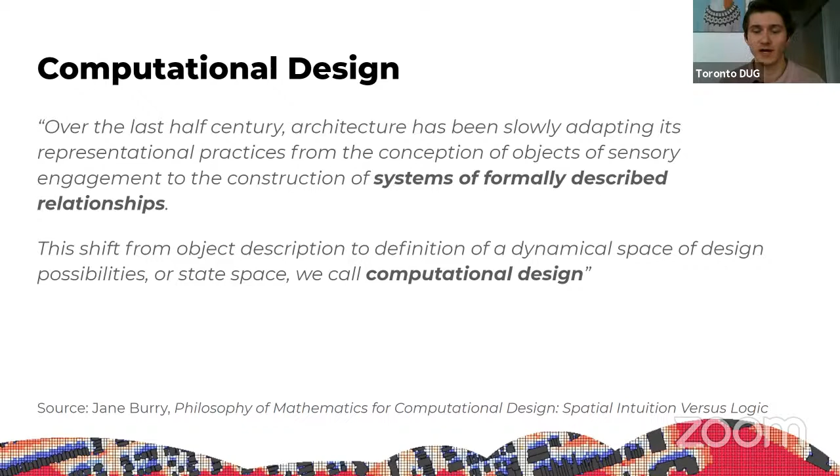Computational design begins when we construct systems of formally described relationships. One of the famous examples of such systems is Gaudi's analog parametric design computer. He explored some of his designs using scale models made of chains or weighted strings. They took him years to build, but gave him more flexibility to explore organic designs, since every adjustment would immediately trigger the physical recomputation of optimal arches.

To summarize, computational design thinking helps designers make sense of loopy, complex systems, chunk big problems into smaller, more solvable parts, devise design systems that integrate environmental performance, manufacturing constraints, assembly logics, and material characteristics, and deduce form from those relationships.

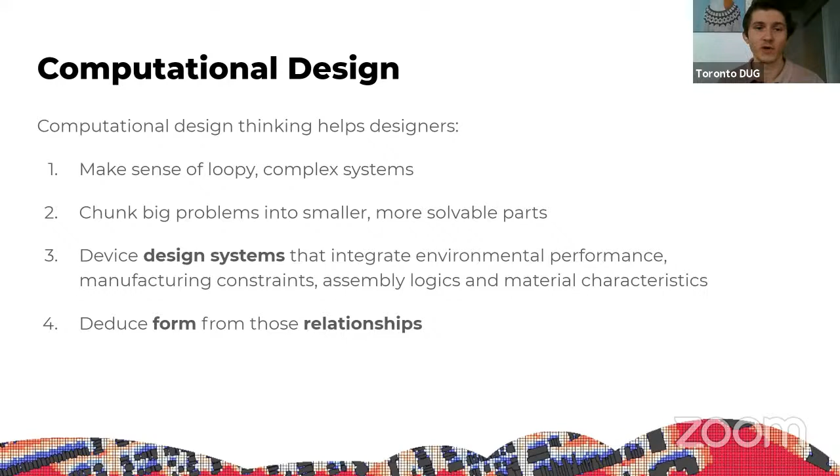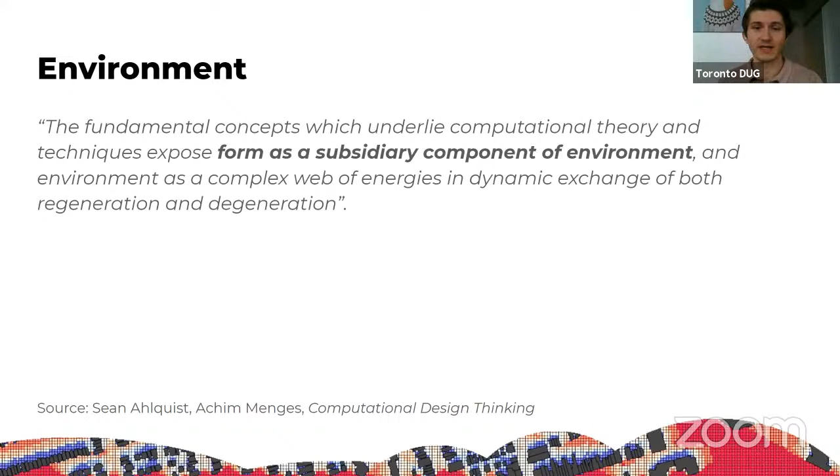Manufacturing, assembly, and disassembly can be engaged with the environment, materials, structural, and architectural systems by means of computational design. Fundamental concepts which underlie computational theory and techniques expose form as a subsidiary component of environment. The upcoming presentations and following discussion will help us understand how to harness information from environment, materials, and construction systems in order to construct design systems that have the capability to deduce shape, behavior, and the environmental impact of the artifact we design.

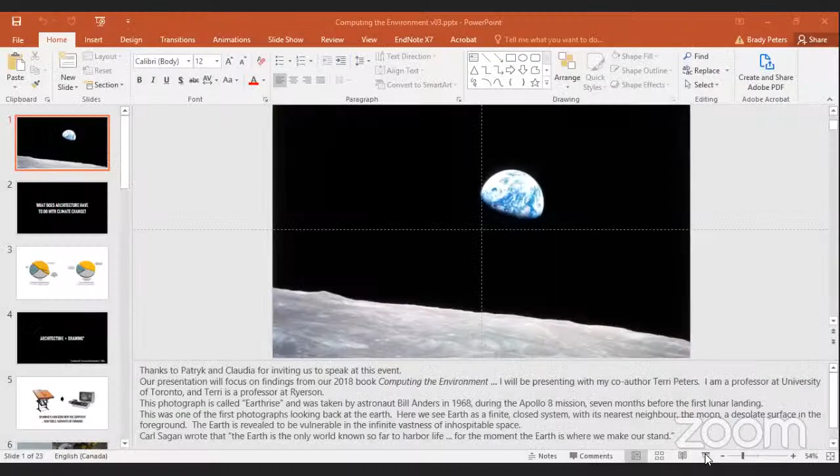This photograph is called Earthrise and was taken by astronaut Bill Anders in 1968 during the Apollo 8 mission, 7 months before the first lunar landing. This was one of the first photographs looking back at the Earth. Here we see the Earth as a finite closed system, with its nearest neighbor, the Moon, a desolate surface in the foreground. The Earth is revealed to be vulnerable in the infinite vastness of inhospitable space. As Carl Sagan wrote, the Earth is the only world known so far to harbor life. For the moment, the Earth is where we make our stand.

So we only have one Earth, so let's protect the environment. But this meeting today is about buildings. So what does architecture have to do with the environment and with climate change? Well, all buildings, even the most sustainable, use energy resources and produce emissions. So this is clearly one way that architecture impacts the environment.

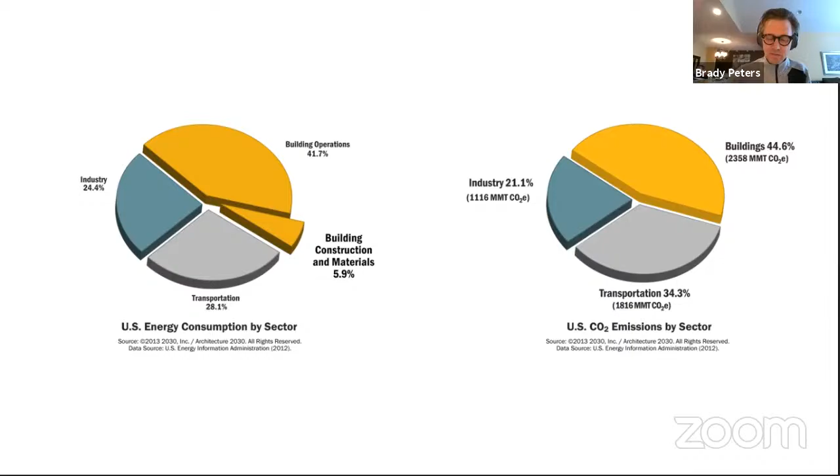I would like to take this discussion in a slightly different direction. The definition of what it means to be an architect is linked to design tools. As Jonathan Hill has pointed out, it was the invention of drawing that enabled the creation of the architect. Being an architect is defined by our ability to conceive of, draw, and communicate the plans for a building at a remove from construction.

However, architects no longer draw on the drafting board, but now with the computer. But the computer is not the same as the drafting board, as Patryk pointed out earlier today. And so with changes to our drawing technology come changes to our profession. New tools mean new ways of thinking. As computer scientist Alan Kay states, computational tools are no longer only rhetorical, but they are processes. They simulate and decide.

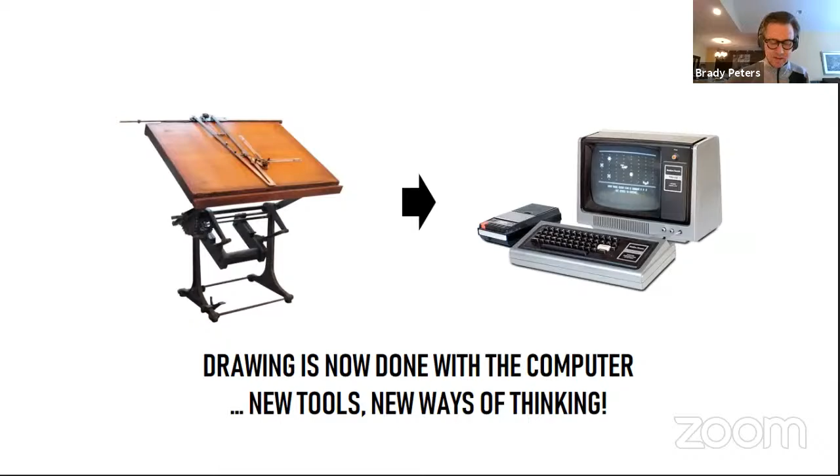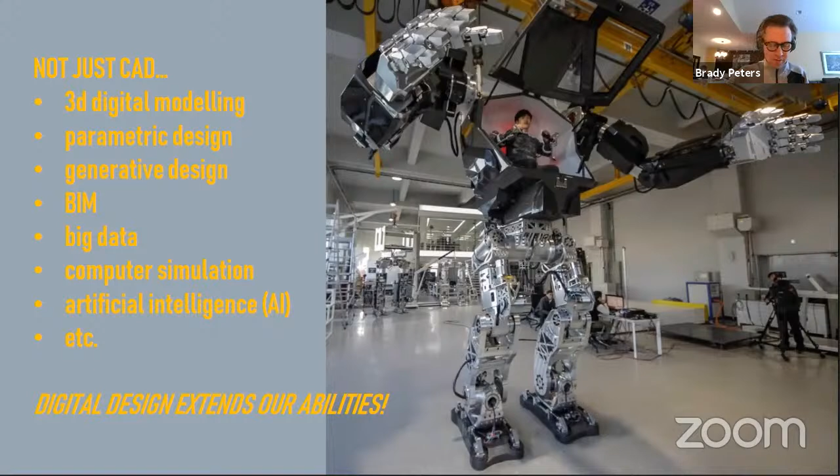And it is not just CAD anymore. 3D digital modeling, parametric design, generative design, BIM, big data, computer performance simulation, AI, etc. These are all now part of the architect's new drafting board. Through computation, architects are now able to realize the potential that Ivan Sutherland hinted at when he invented the first CAD system, Sketchpad, in 1963. Like the mech suit pictured here, digital design extends our abilities.

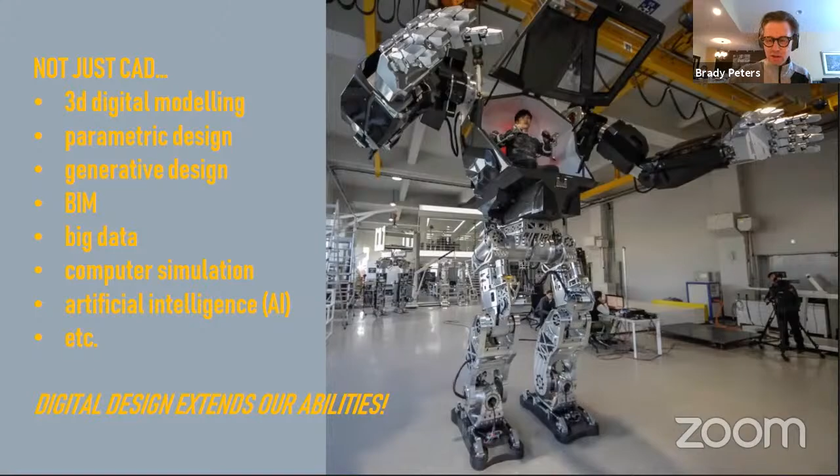So, architecture is related to drawing and also very much related to design. Architects design for the future. Necessary optimists, and to borrow from Herbert Simon, architects design to make existing situations into preferred ones. Architects, professionally and ethically, are driven to make a better world, not just for their clients, but for the population at large and for the environment as well.

So, given that there is a climate crisis and buildings are part of this problem, they're impacting this crisis, and that design is now done using computation, how can our design technology help us? How can computation impact design to improve environmental performance? This was one of the driving questions for our book, Computing the Environment.

The research done for this book comes from both Terri and my firsthand knowledge of architectural design and environmental simulation practices, but also for this book we carried out interviews with architects and engineers from leading practices worldwide. One of the things we found was that in every practice we interviewed, architects and engineers were using a whole constellation of different design technologies.

Today, building designers must be able to navigate a constantly changing landscape of digital tools. For example, the Building Energy Software Tools Index lists 147 software packages just for environmental design. And it's not just using tools, but developing their own tools. The designer has become the tool maker.

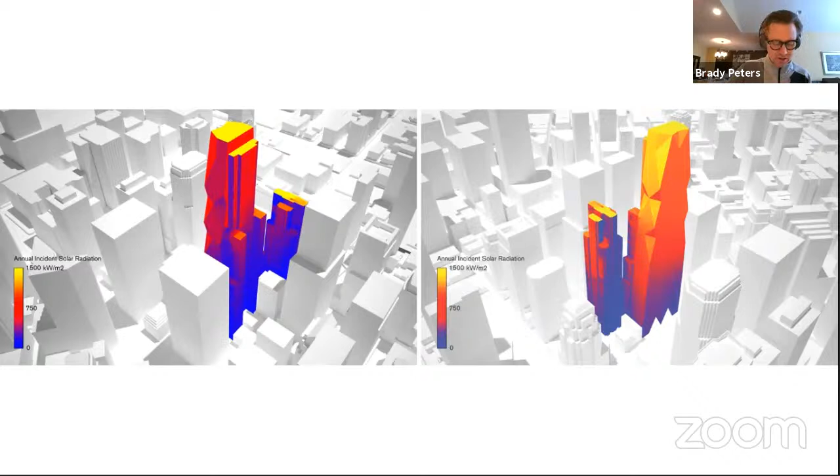Author Kjell Anderson writes that while design simulation is often seen as a specialist tool for predicting energy performance, the greatest value for architects is the freedom to play with design ideas and receive timely feedback. The SMG has written a custom tool for MicroStation that implements radiance and have created their own wrapper for widely available environmental tools, Ladybug and Honeybee, which they call LadyBee.

A key part of the design for this project is at the ground floor, where the building has been 'lifted up' to create a new urban room that is open, accessible, and transparent. The project promotes a sustainable model of high-density mixed-use development.

The team used performance simulation to understand the user experience in various ways: light levels, both artificial and natural, glare, the thermal environment, and acoustics.

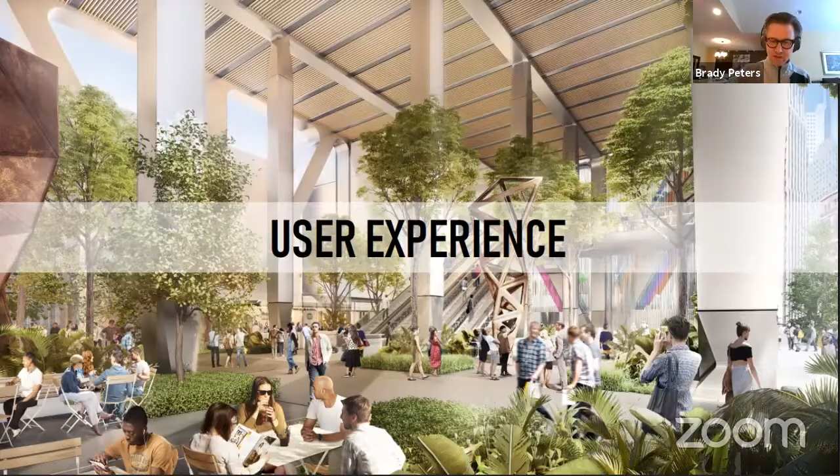Over the last 10 years, the SMG has developed expertise in computational fluid dynamics, CFD, which is used to predict wind and airflow. A series of CFD simulations were carried out at various places around the tower, studying the influence of various building shapes on wind distribution.

Both CFD and wind tunnel testing were done, but CFD offers considerable advantages as it can be completed much faster and in-house. The SMG ran simulations for 16 wind directions, and this data was combined with weather data.

They found that the tower was intercepting wind at high level and pushing these winds down to lower levels. In response, the SMG designed a wind canopy so the wind doesn't reach the inhabited level.

The SMG also found that the software architects use to compute the radiant environment is generally fairly inaccurate, so they aim to develop new tools that predict performance with a reasonable level of confidence yet still run fairly fast. For the urban room, the design aspiration was to make sure the space was comfortable.

Using the Universal Thermal Climate Index metric, the team simulated the public space along with similar spaces in the surrounding area for percentages of the year that are comfortable.

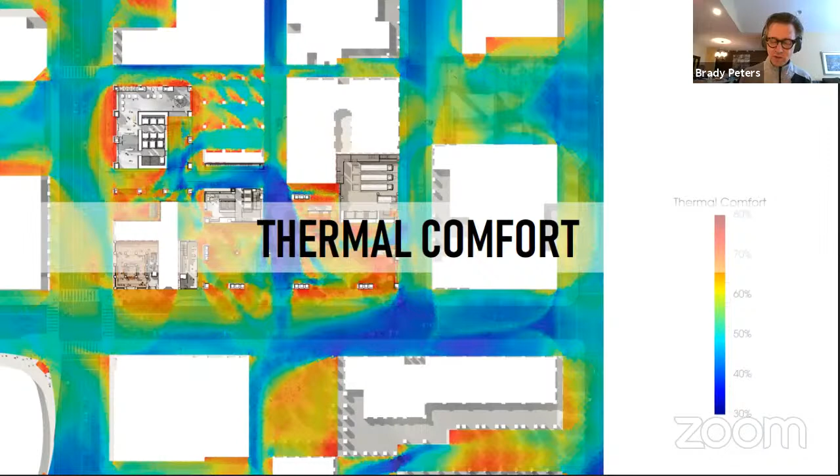Xavier De Kestelier explains that we find ourselves in a middle ground, creating tools related to design, but that are still really accurate.

Acoustic analysis was largely done with a plugin to Rhino called Pachyderm, an open source software that computes performance using ray tracing algorithms. Philip Robinson, the team's former acoustic expert, has found that importing geometry from CAD to commercially available simulation software is an onerous process.

But by using Pachyderm and Rhino, he is able to both design and simulate using the same software, and therefore does not have to bother with translation.

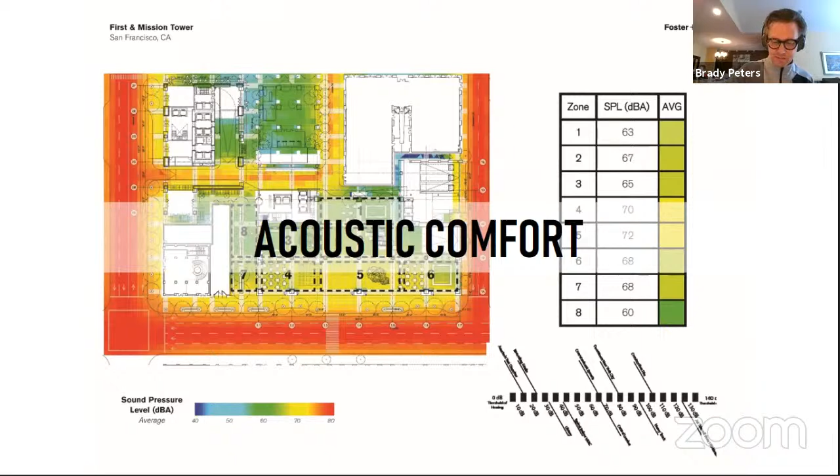As computational tools for environmental design mature, the potential of what teams like the SMG can do with them becomes much greater. SMG partner Irene Gallou speculates that simulation will give young architects a tool to understand the environment and to develop intuitions about the impact of architectural design on environmental performance.

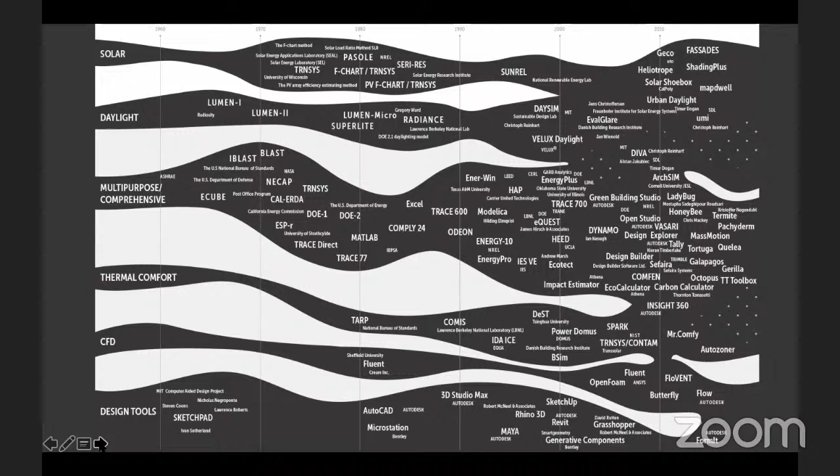Over the last 10 years, there has been an explosion in digital tools that designers can use. In the book, we examined a history of building performance tools from 1960 to present and created this diagram, clearly inspired by Charles Jencks's 1973 graphic of architects and movements. We looked at the recent history of building performance and simulation tools, when they were introduced, and really saw this huge explosion in the last 10 years and even increasingly in the last 5 years.

One of the main points I'm going to draw out of the Computing the Environment book is this idea of visualizing, and visualization leading to understanding. Visualizing data allows us to understand it, to share it. That's how we can communicate and create trust between disciplines.

To illustrate that, in the book we interviewed GXN, which is the innovation group within Danish office 3XN, and talked to them about how they use digital tools and how they use simulation.

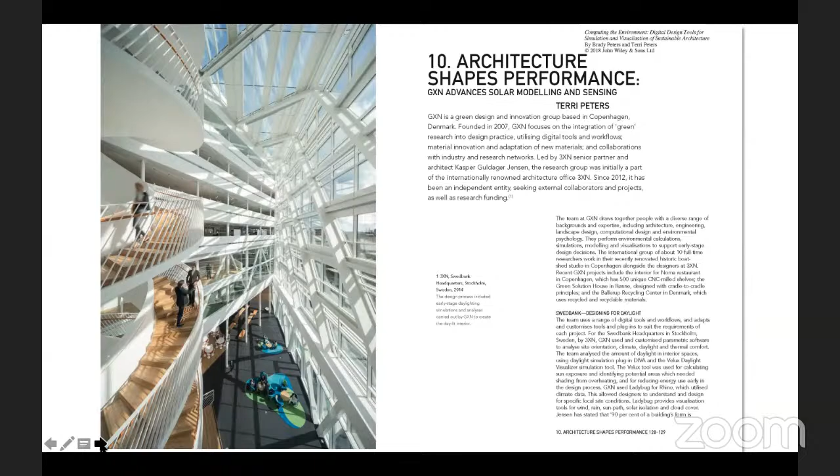This example illustrates that they regularly use environmental simulation on all of their design projects at an early stage. For this example of a new bank headquarters, they worked to take quite an abstract design idea—openness, connecting to the street, connecting to the public. The client's wishes were to translate this into creating a collaborative, comfortable environment for people working in this building. So how to translate these big ideas into architecture?

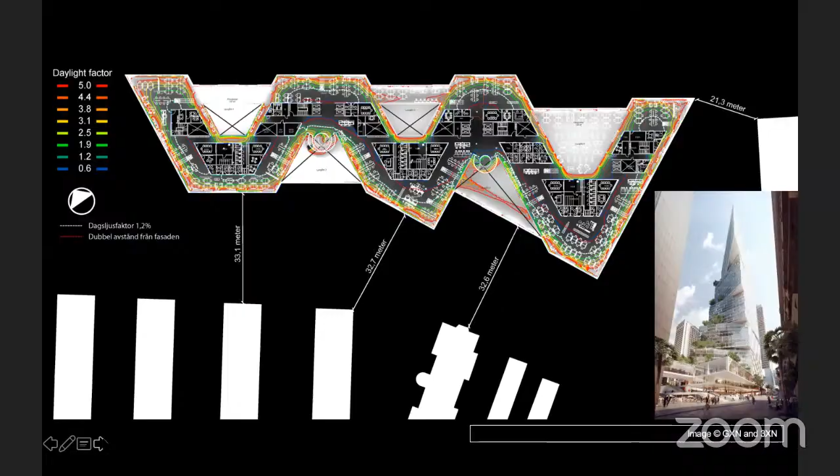A key was to use daylight to drive the building's form. In this image, they used the Velux daylight visualizer tool to calculate the daylight factor for interior spaces, while considering the relationships between building geometry, orientation, and views. You can see in the small photo there, the floor plate shifts in orientation as it moves up. So they used environmental simulation to get actual visual feedback about design decisions.

Rather than spreadsheets of data, they had visual graphics that allowed them to better make design decisions and bring them closer to design intent. So in this case, the goal wasn't about minimizing energy use and energy consumption, but actually their goal was for people to use the space, to enjoy the space, to be comfortable.

The client for Swedbank said some people had been at the company for 25 years and only met each other for the first time the week they moved into the new headquarters. They had never crossed paths before, even though they worked in the same office. So it's this idea that they can use the feedback from their simulations to make design decisions to get closer to their design intent—in this case, for collaboration, for openness, for people enjoying the building.

The second point I wanted to draw out of the Computing the Environment book is that data can also change behavior. So we can use data to change and understand people's behavior in buildings using real-time feedback.

Another project from 3XN is their Green Solution House, a hotel and conference center in Denmark. I'm using it to illustrate the idea that some of the new metrics for sustainable buildings and energy consumption are not easy to visualize. With this kind of data, if you can't communicate the findings, it's of limited use.

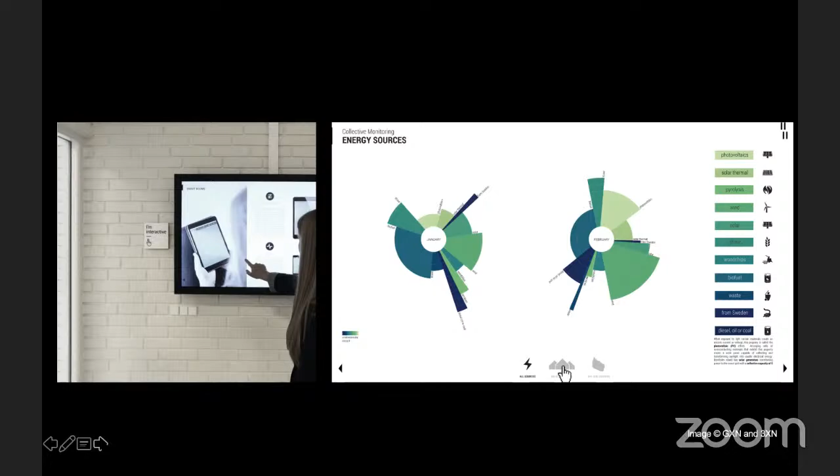This is called the Smart Room Collective Monitoring Project, and it was a collaboration with GXN and Autodesk Research. It really addressed the idea that visualizing data is an important part of collecting the data and putting action to it—so it looks at communication of data. And these are the nice rooms at the hotel here.

So the third point I'm going to talk about is designing for microclimate—collecting and using on-site microclimate data to inform simulations.

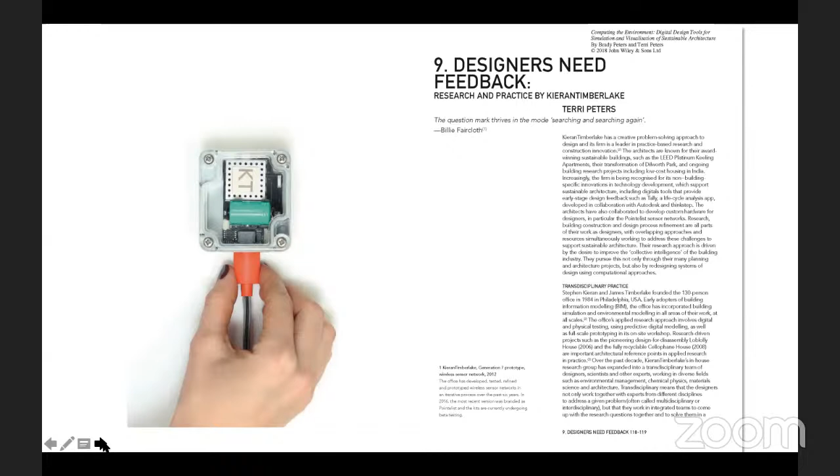Another office we interviewed is KieranTimberlake, an American office, and they use real-time environmental feedback as a design tool in their projects. We interviewed them about how they use digital design tools—which tools they use, how they use them in projects—and we were surprised to find that in recent projects they are really interested in collecting microclimate data on their sites.

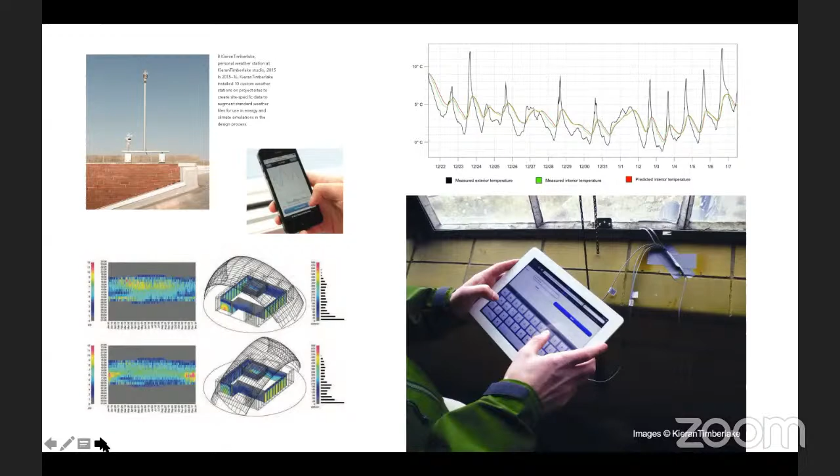They're actually installing weather stations on site on different projects, and recently installed 10 custom weather stations on project sites. So rather than relying on more general climate data, like TMY files for a specific location, they're collecting their own data to input into their simulations. They also do renovations, and they're looking at collecting really accurate, site-specific data about the renovations they're starting with, in order to develop responses that really connect to the existing conditions.

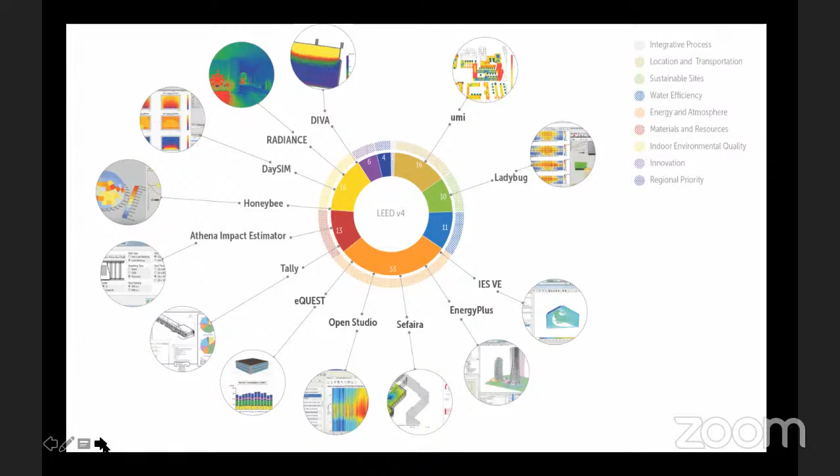The next point I'll talk about is sharing data—considering interoperability, workflows with different tools, and sharing data. This is obviously a huge issue in practice. In the book, we looked at many digital design tools that practices use across 12 profiles of offices. We looked at what kinds of sustainable design parameters the different tools account for, and mapped these into LEED categories to really examine what kinds of digital tools people are using.

Something we touch on in the book is how we need to use collective intelligence and shared insights to interpret and really use the data we collect about buildings—looking at building performance and the relationship between design intent and buildings in use more carefully, so that we can compare them and make better predictions.

In the book, we featured Toronto office Diamond Schmidt Architects and their database for collecting, comparing, and analyzing energy use in buildings that they design. This is called Ecometrics, and they're able to collect data and compare it across a number of projects they design in the office.

Then they have a really informed starting point for the next project that comes into the office. They already have an idea of what techniques have worked, what are reasonable assumptions to make or aspirations to have about design performance. This is really rarely done in an office, and if it is done, people weren't sharing it with us.

We talked to people about how they collect and map the building data they have for all their projects and compare it to one another. You're collecting all this data—how are you using it? We think there are still a lot of barriers about sharing data within offices, let alone externally, and that's an area I could see practice developing in the future.

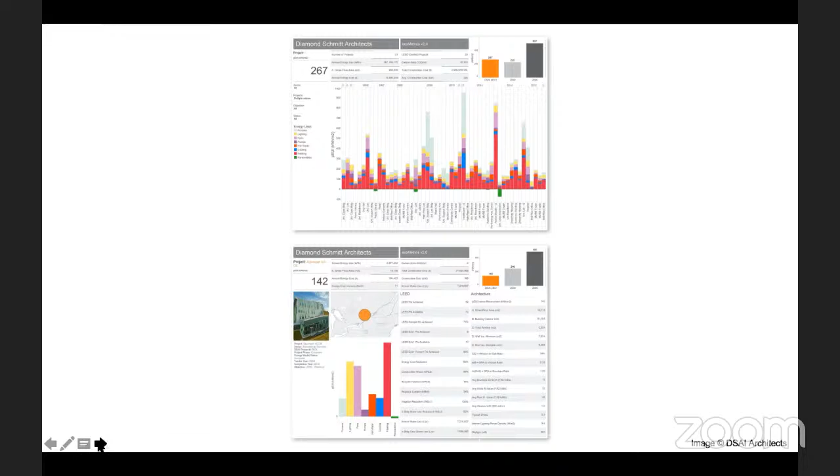The last point I'm going to talk about is the idea that it's hard to care about the environment, and it's easier to care about ourselves. So I think reframing sustainable design as design for well-being and design for people is a really important way of getting more buy-in and people making more effort in sustainable design. I'm thinking, what kind of building data would you collect if you were concerned with people's health and well-being, if that was driving the design? And what kind of feedback would you need or want?

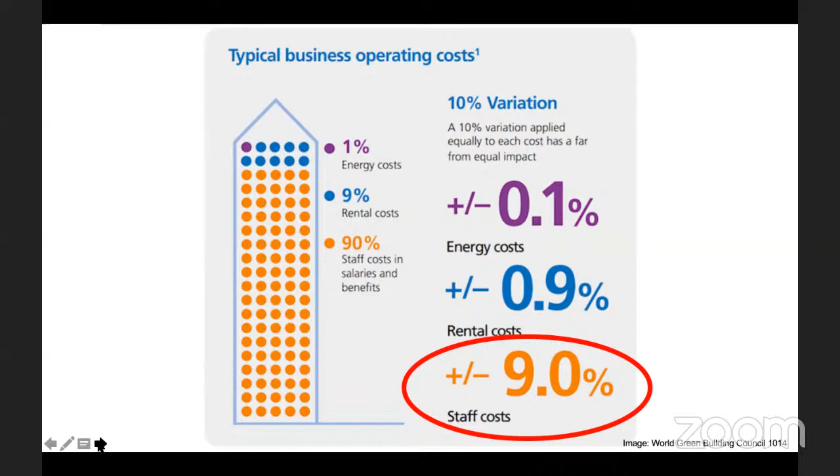Many of you are familiar with this idea that in a building, for typical business operating costs, it's not the energy costs, it's not the real estate costs, it's the people that are the valuable asset here. It's training staff, recruiting staff, keeping staff. It's the people, and it's also the people that use the energy in buildings. So really understanding in detail how people use buildings and the impact that people have on buildings. Sustainable buildings need sustainable users, yet occupancy and occupant data is really one of the areas of environmental design and simulation that we have the least information for.

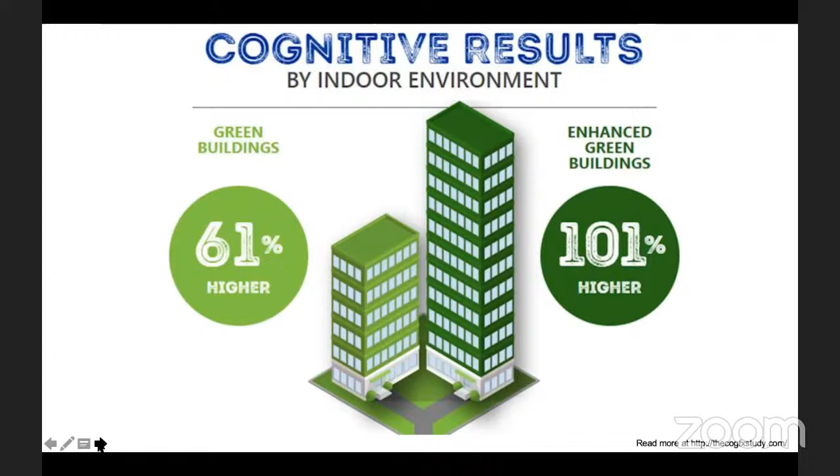Many of you might be familiar with the COGFX studies that show in green buildings, people seem to perform better in cognitive tests. So green buildings and enhanced ventilation are really important for sustainable buildings, but also for people's performance in buildings. There's a lot of different aspects we could explore using simulation relating to what makes spaces both healthier and more environmentally better performing.

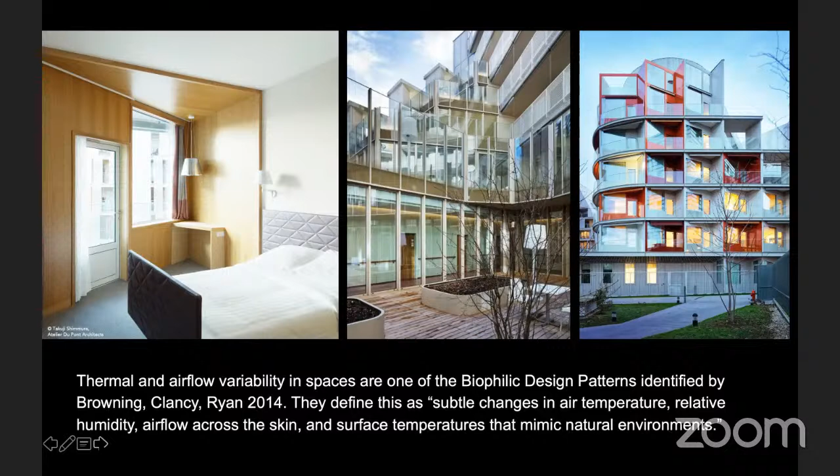For example, biophilia, connection to nature, and different ways of looking at lighting. In biophilic design, it's becoming more relevant as it becomes a measured aspect of, for example, the WELL building standard and living building challenge. One of the principles of biophilic design is thermal and airflow variability in spaces - the subtle changes in air temperature, relative humidity, airflow across the skin. This idea that designers should be designing for variability is something we can do with building simulation tools. We have new tools like the ALFA tool for circadian lighting, which is a way of measuring and evaluating lighting in buildings that connects to more human-centric approaches.

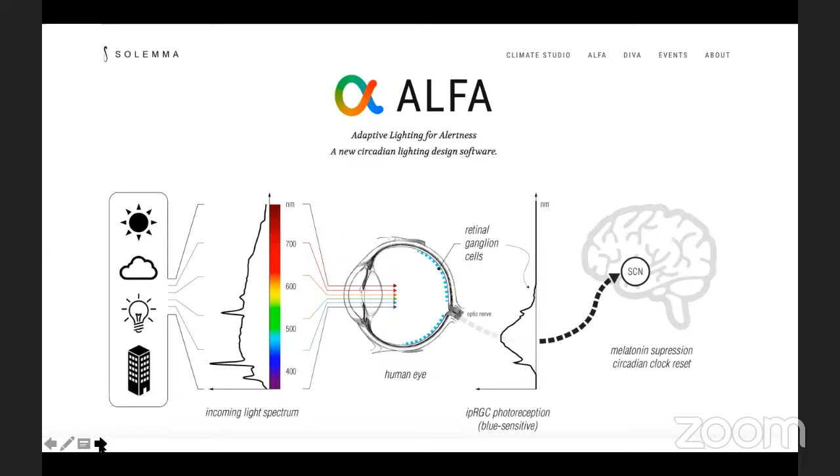To sum up, I've talked about some key issues in computing the environment: this idea that visualization equals understanding, data can change behavior, designing for microclimate, sharing data, and we are the environment. Thanks very much.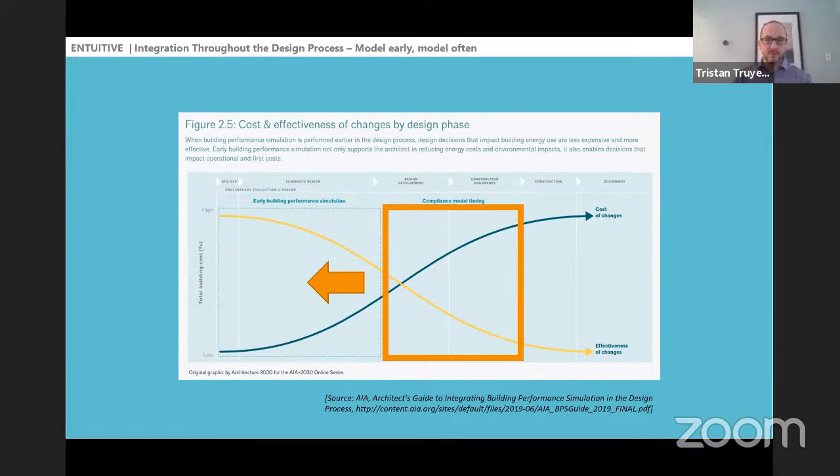Traditionally, the analysis of a design's energy consumption was held until towards the end of the design process, when it was felt there was enough information that an accurate energy model could be prepared. But given that we know those models are necessarily going to be wrong, striving for an accurate prediction of final energy has always been a bit of a fool's errand, and using it as the focus of all sorts of modeling work has offered very little value to the design process. So we need to change that.

Much more common have been attempts to engineer our way out of the problem, or engineer our way to high performance, by selecting top-end mechanical equipment and complex control systems to compensate for design elements like extensive balconies and floor-to-ceiling glazing.

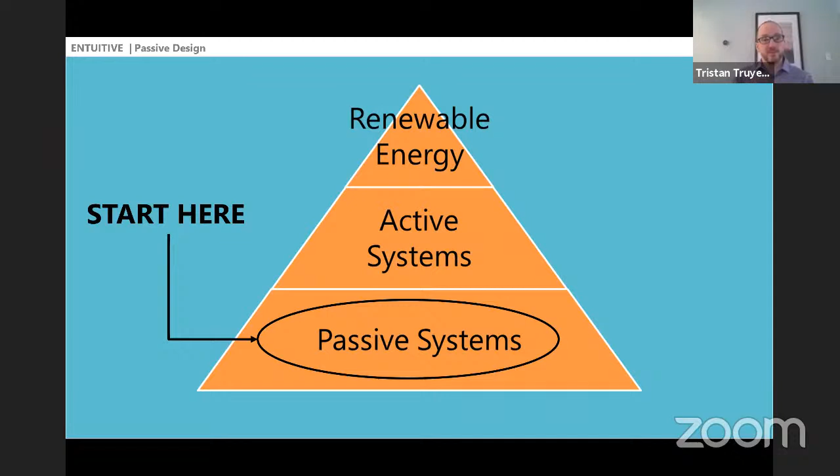We really need to start thinking passively first, asking questions from a project's outset about how the envelope, massing, orientation, opacity — the list goes on — of a building can be used as that first thrust towards low carbon performance.

As Terry mentioned, doing so requires taking a look at the climate of where you're designing, microclimate data if you have it available, to evaluate things like total solar resource — how much heat can you get from the sun passively when you want it? And conversely, what periods of the year are we really going to want to block unnecessary and harmful solar radiation? How many hours per year can we likely open the windows and allow ideal internal conditions through natural ventilation?

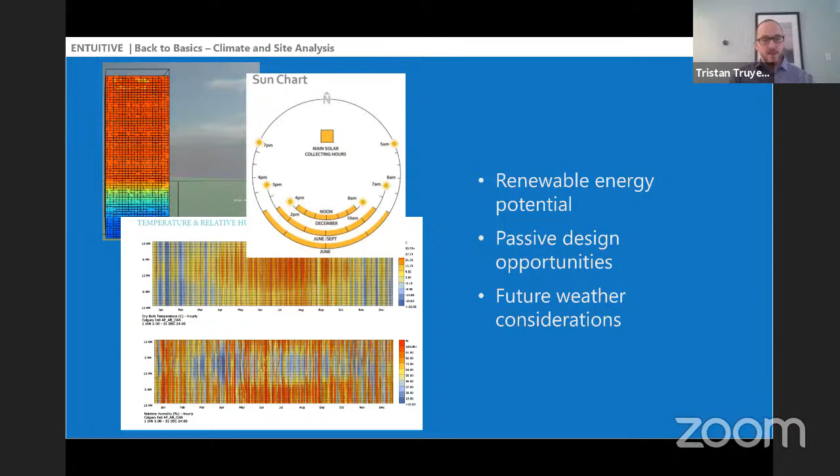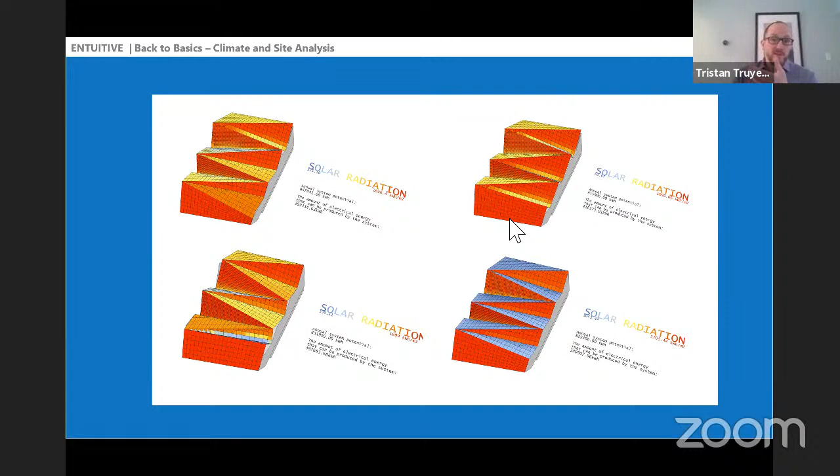The images on this slide are tests that we did — actually tests that Patrick did — of slopes of roof surfaces destined to host solar panels, to ensure they were optimized to the solar angle as well as still giving the architectural expression the client was after. Same story could be said about simulating for depth of overhang and what it can do to the cooling requirements of a space.

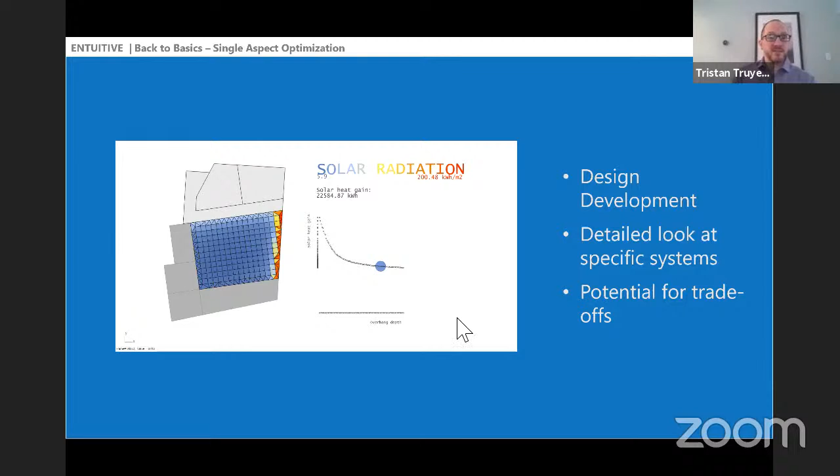And similarly, there's a wealth of data that can be extracted from very simple box representations of a single floor or single thermal zone, which again allows for very rapid exploration of high-level design choices.

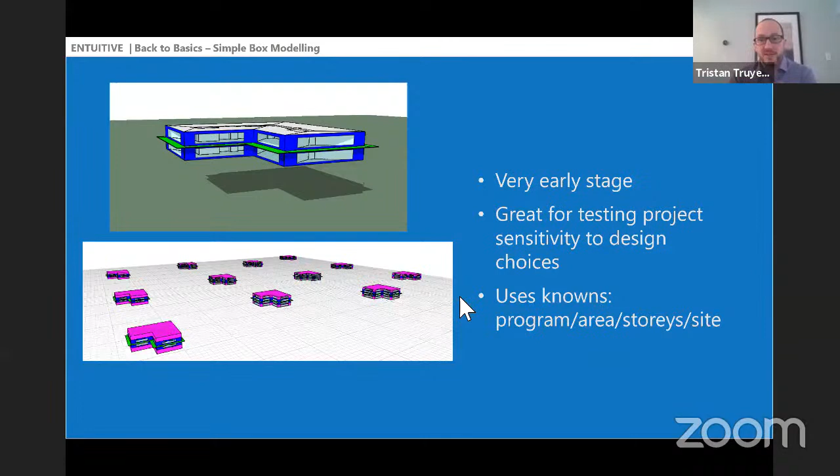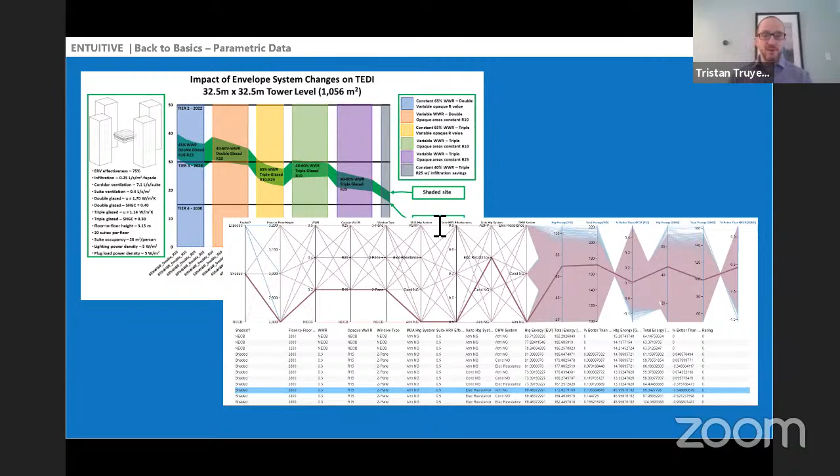Just to make a callback to Terry's presentation, it's really important that we all find creative ways to represent this extraordinary volume of data produced by digital design tools, so that it can be communicated effectively with the project team. Parallel coordinate representation has become de rigueur lately, but there are plenty of other methods to make sure we're parsing these large volumes of data so project teams can understand them and make design decisions appropriately. After all, we're not just doing this analysis to show off how smart we all are.

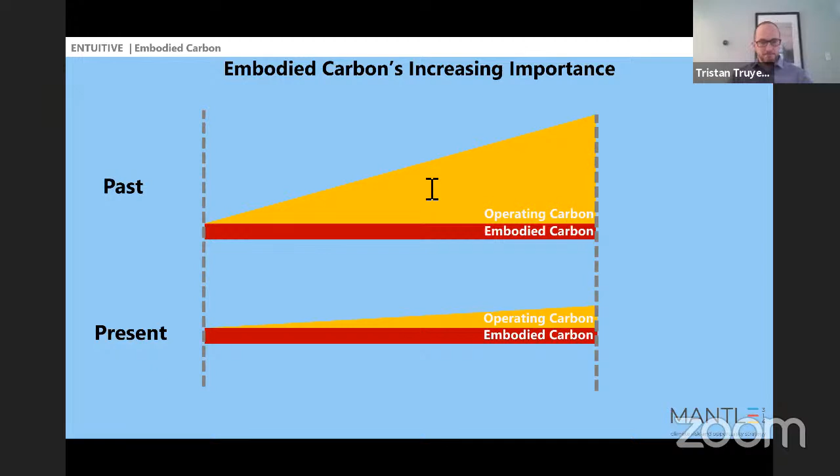But as we push towards net zero operating carbon, the red block becomes a much more significant portion of the total emissions associated with the project. When we look at our near-term and most aggressive goals to course correct by 2030, it becomes clear that embodied carbon impacts are crucial to address.

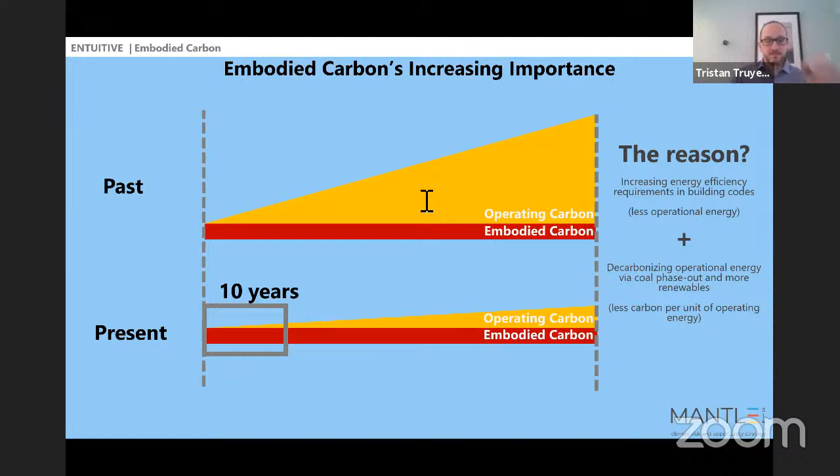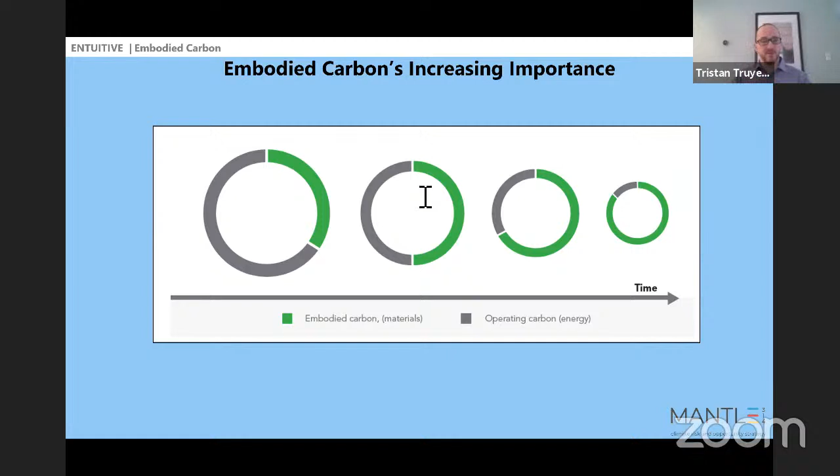Addressing embodied carbon requires looking primarily at the building's structural systems, which complicates matters further, as this is an area of design historically averse to being wrong, no matter how useful. Structural engineers like to know for sure the building is going to stand up, hold its form, and not deflect over time. So there are some good tools starting to bubble up to help designers grapple with these problems. One-Click LCA, Tally, EC3 have all really started to show real value and get real uptake in the marketplace.

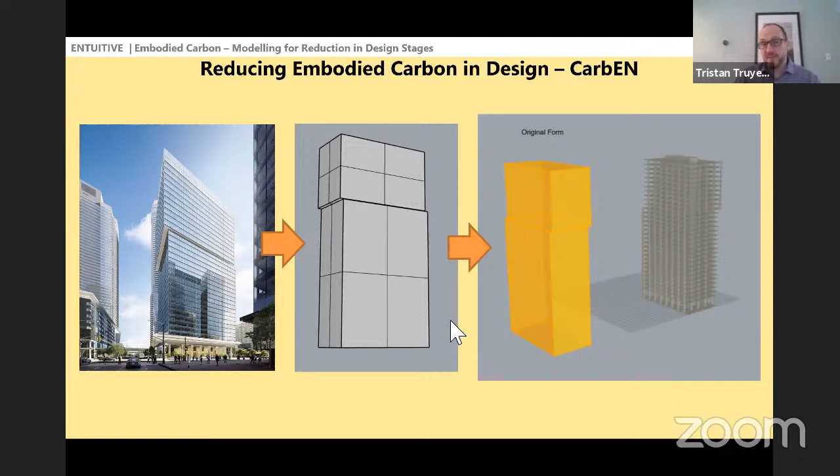We've also been working on a simple tool internally here at Entuitive that can help us answer these questions for design teams as early as possible, breaking down a design concept into its simplest forms and applying bulk calculations so we can get a reasonable order of magnitude of the volumes of structural and building envelope materials required for a design.

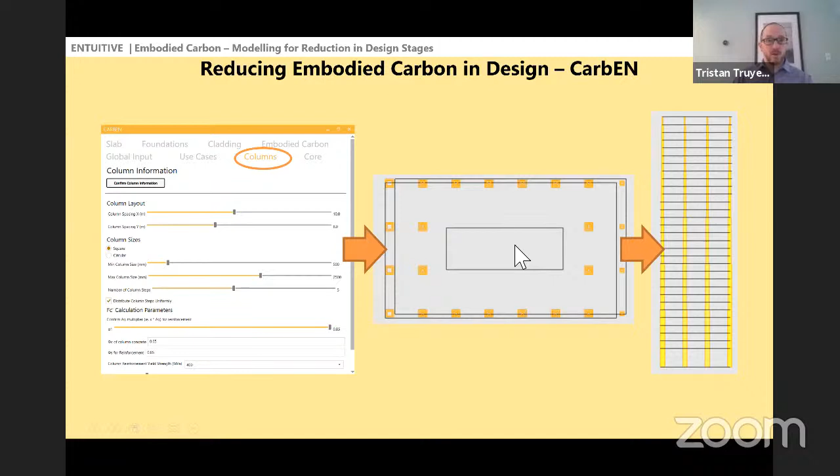It does so by taking some inputs and answering conceptual questions about the columns, cores, slabs, and cladding of a building, then uses those details to compute which subsystems within a building have the highest embodied carbon, which allows design teams the information they need to take a targeted approach to its reduction.

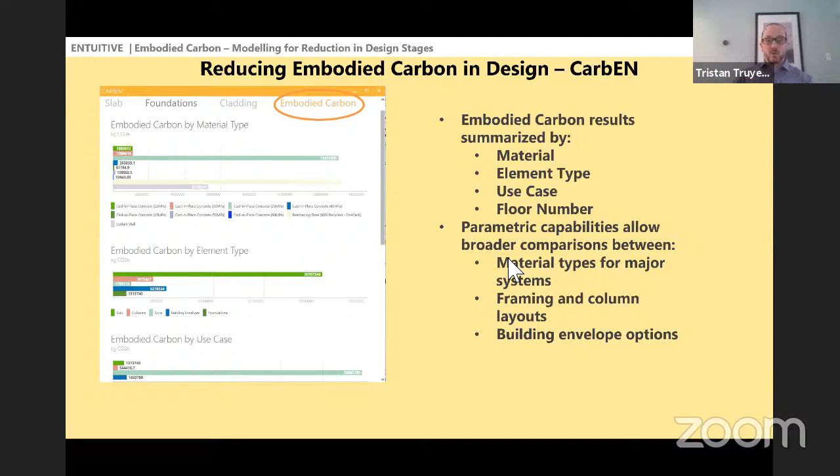So it's a bit of a whirlwind tour, but I'm really hoping some of that was informative, and I'm looking forward to the questions and discussion that's going to come up with the panel. Thank you all for your time and attention, and I'll see you back here in a little bit.

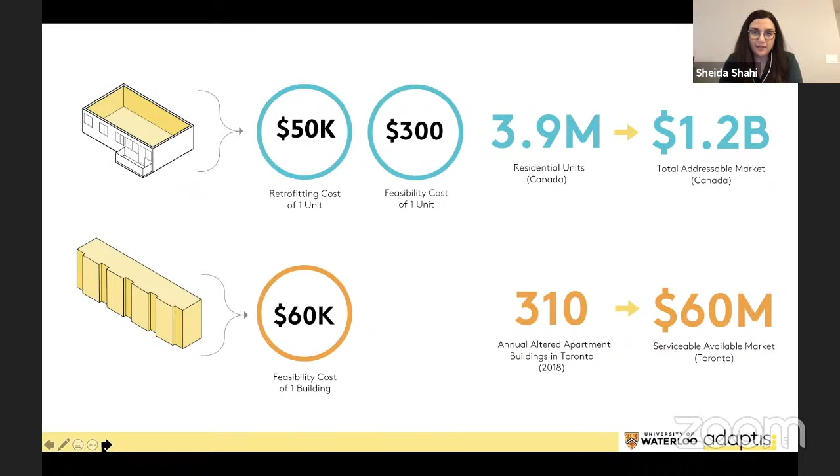There's a lot of money being invested in these towers in various ways to try to retrofit them. We're seeing a gap in feasibility studies of what to do with these buildings and how efficiently we can address them. To give you an idea of the market: 3.9 million units need to be retrofitted by 2050 in Canada, giving us a total market of 1.2 billion just for the feasibility analysis cost prior to design. So it's a big problem.

Where we come in is we try to create a tool that optimizes and informs the client to be able to make better decisions regarding their towers.

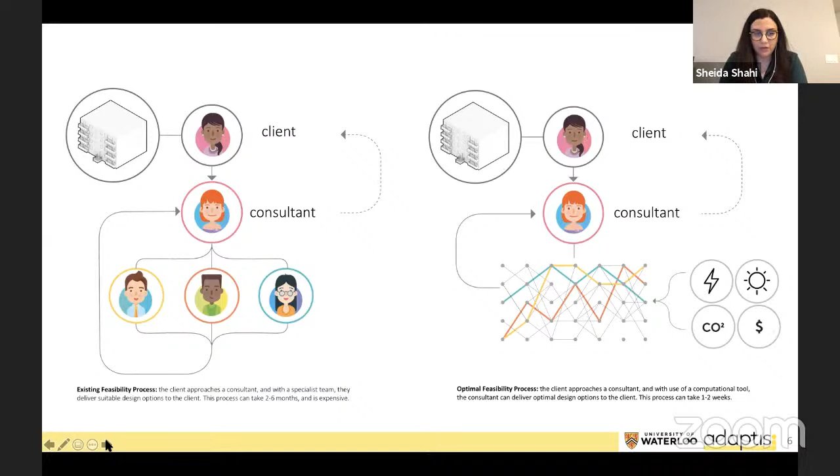I'm going to go through one pilot application: the Ken Soble Tower, currently under construction in Hamilton. It's the first passive house retrofit tower in all of Canada. In this study, we looked at alternatives of what could have been if we took a more expansive approach.

From all of the identified residential adaptation strategies, we picked out two: recladding and extending. We tried to optimize based on energy use, daylighting, life cycle carbon emissions (global warming potential), and life cycle costs.

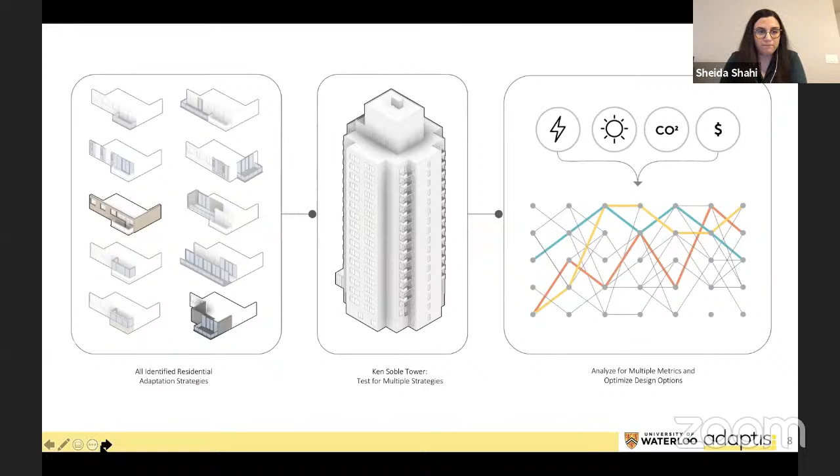As a first step, we took the existing building, defined parameters and grids—I'm sure we'll hear more about this with Element5 and how modular construction works. But defining those parameters for modular construction is extremely important, especially when dealing with existing buildings.

We defined patterns for growth: where can this building actually grow, how does it make sense with the spatial layouts, and in what direction does it make sense to grow?

After we had the volumetric modules set, we started looking at panels. We set out multiple scenarios and picked out what panels need to go where, and came up with a range of 25 set panels with different widths and lengths.

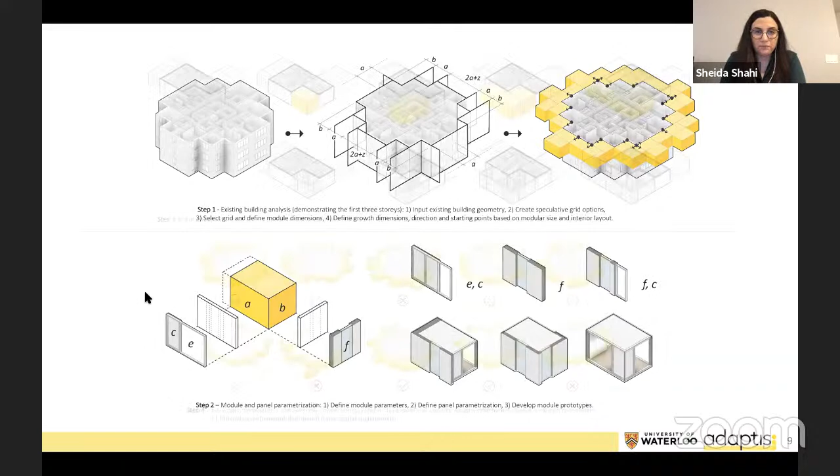Next, we started looking at possibilities of separate unit growth. With one extension you get a larger unit, but when you grow large enough, you could divide up the units and generate extra revenue—I'll get into that later.

As the algorithm starts to generate design options, we start parsing through those and eliminate the ones that don't meet our guidelines for design.

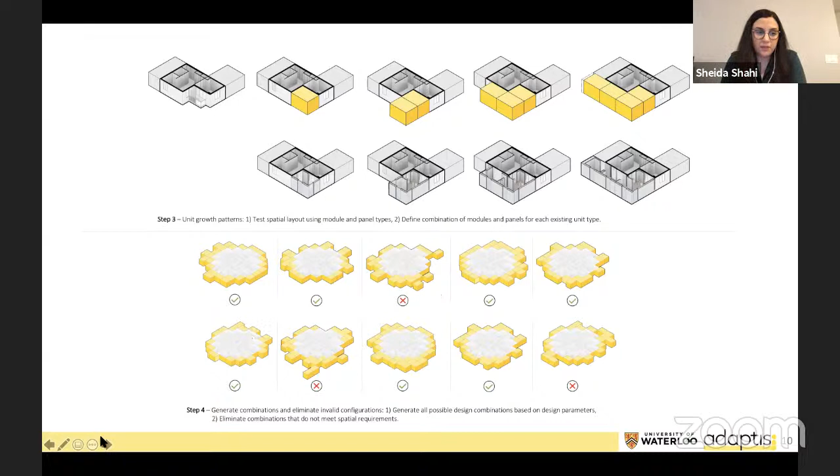An example of what that looks like: with a simple extension, you're increasing the unit, which is great in a lot of cases. Clients we've talked to have examples where a family of 10 is living in a 2-bedroom unit. So from a social sustainability point of view, it's very important to be able to extend some of those units, but it's also important for these buildings to start generating extra revenue so they can have sustainable paybacks. Keeping the same unit but extending it is the ultimate goal.

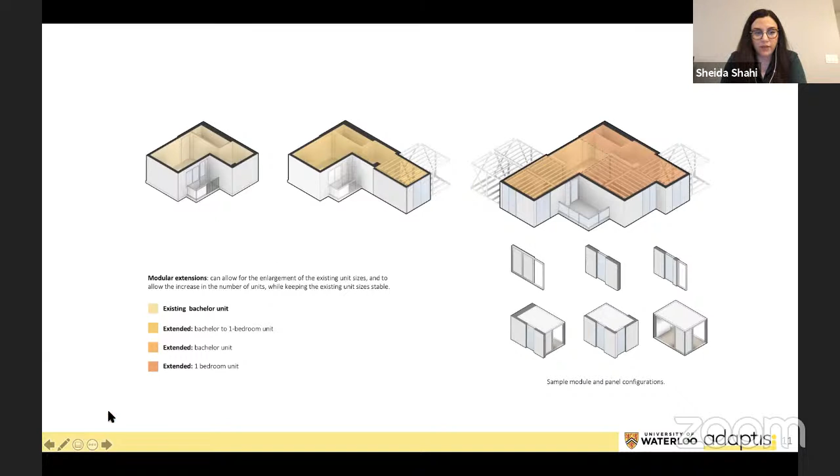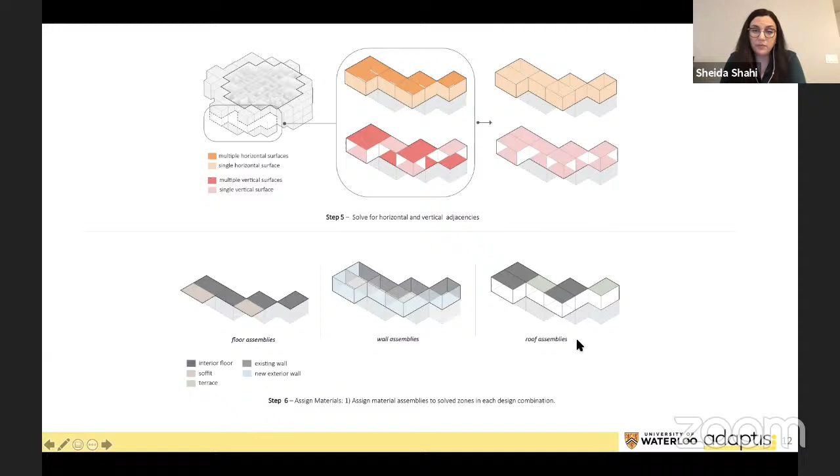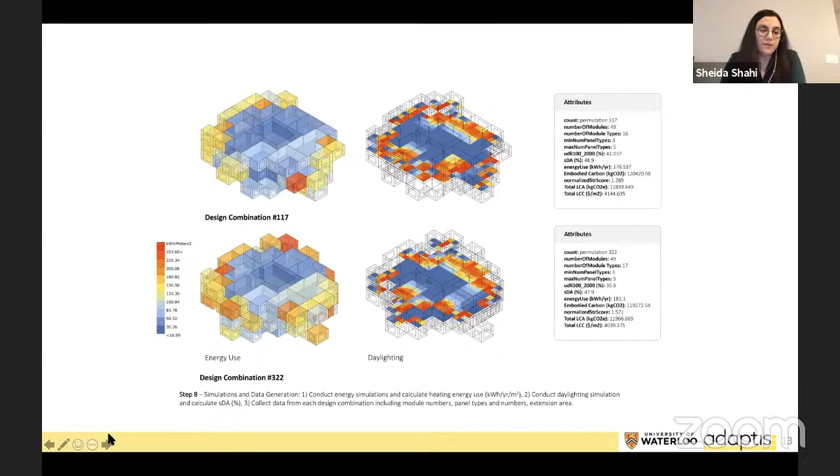The next step, after generating the design options, we solved for adjacencies and were able to assign materials—floor assemblies, wall assemblies, and roof assemblies—so we could calculate the energy use and daylighting for each of those permutations. The life cycle analysis and life cycle costing are also based on those material calculations.

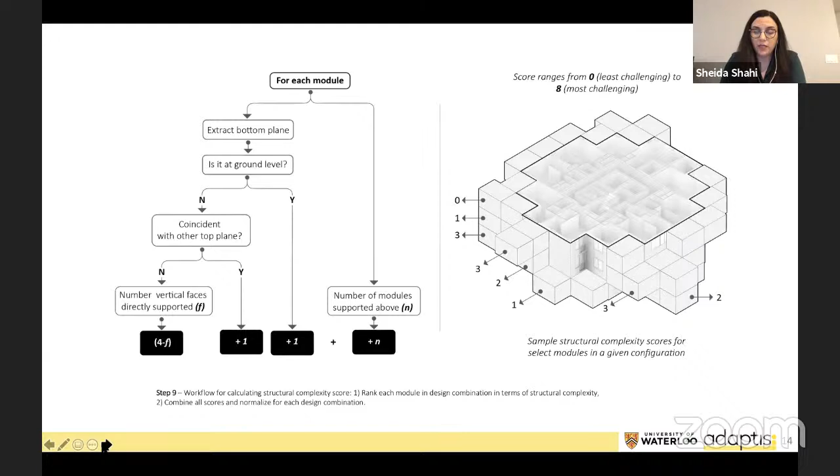We also took into account the structural complexity of these modules. We defined a workflow—a lot of this work was developed by my colleague at Waterloo, Chris Rauch. We were able to give a score to each of these modules and then factor that into our life cycle costing and performance.

And then the last step, when we map life cycle costing versus structural complexity score, which is a proxy for design complexity, we could start to pick out the Pareto-optimal design solutions that look something like this. So the frontiers are here as an example, and the secondary options are here. This is what our results ended up looking like, 600 of these.

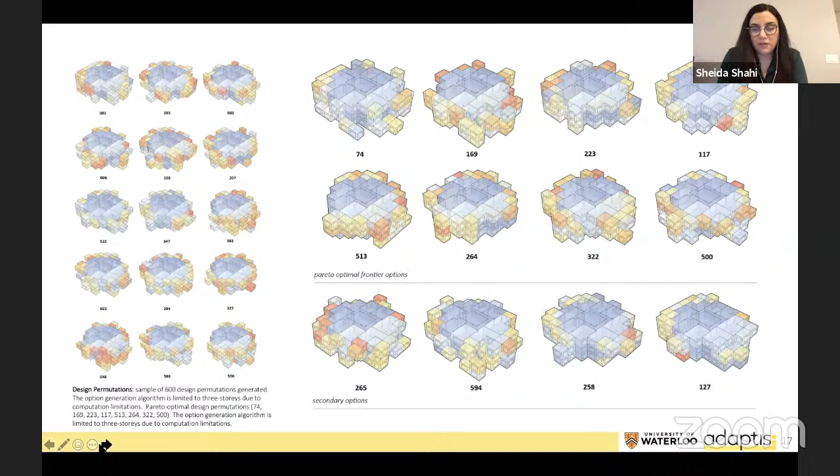Jumping into the future work, we're working towards developing an interface that can streamline the whole process and make this tool easier to use. Right now, it's a whole bunch of different components. And the last thing that needs to be added to all of this is a financial analysis.

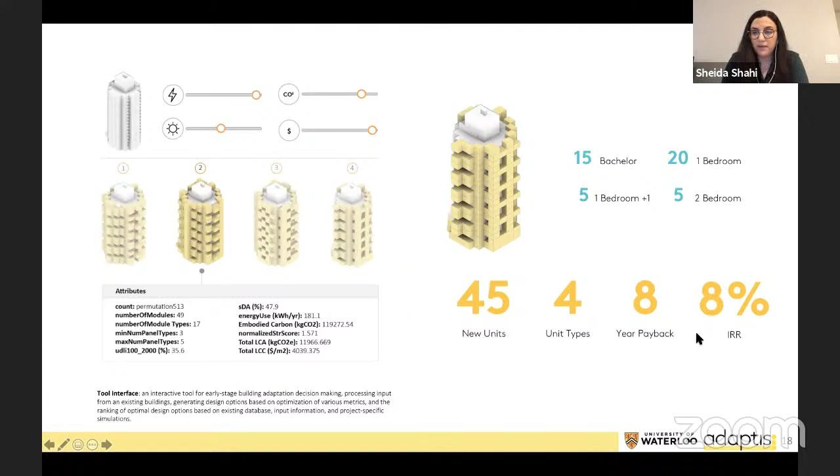As an example, what I spoke about earlier, developing new units, extra units, and that revenue can help pay back for this project. So in this example, we were able to generate 45 new units, 2 extra unit types, so right now there's a total of 4, with an 8-year payback and an internal rate of return of 8%, which is pretty good.

So in the next 6 months, we're looking for more pilot projects, either new buildings or additions and adaptations like I showed you here. And hopefully in the next 2 years, when we have enough data, we could start to develop predictive models that can even make this process faster. Thank you very much, and I look forward to the discussion.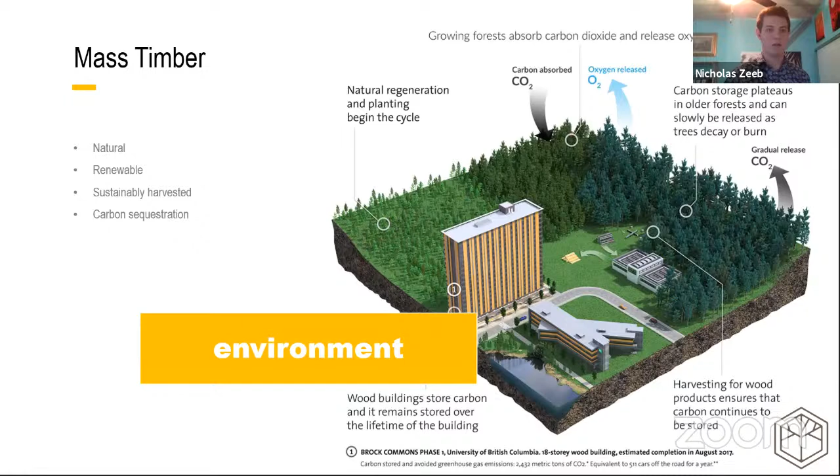To achieve the benefits of mass timber that Patrick alluded to in the previous slides, there's a couple different categories of areas that we need to focus on, and Element 5 provides services in all of them. Number one, structural design and detailing, meaning either you're bringing on a mass timber engineer, such as Element 5, or the mass timber fabricator is offering design assist services to the engineer of record or to the architect to avoid common mass timber design pitfalls.

Second category, we have detailed 3D modeling, where to have a successful mass timber project, you need to create a fully developed LOD 400 ready-for-fabrication model.

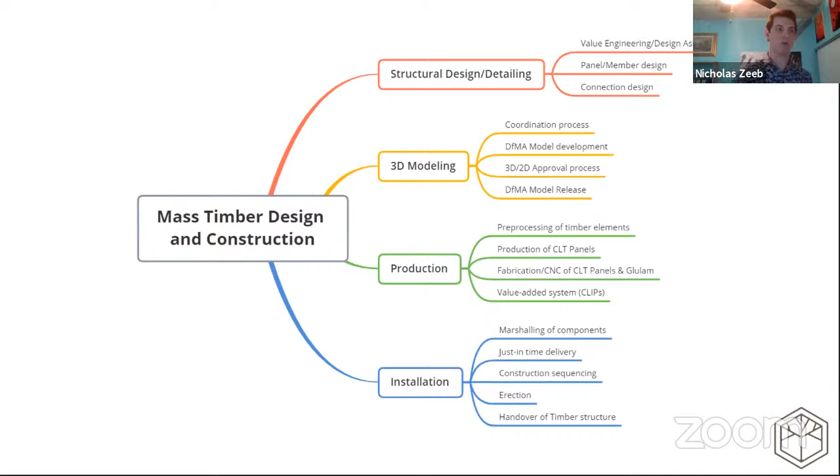Which brings us into the third category of production. By taking that model, the guys at our factory will be mad at me for saying this, but you effectively hit print, and then those CLT panels and glulam elements can be built in our state-of-the-art factories in St. Thomas, Ontario, or Ripon, Quebec. The last category is installation, where we focus on creating efficiencies during construction to reduce time on site, which further reduces greenhouse gas emissions.

Now, Tristan stole my thunder a little earlier with this MacLeamy curve, but we're going to use it too. We're going to go through it line by line. To understand the mass timber design process, this graph shows time on the x-axis, which is all of the design coordination phases, and on the y-axis is the amount of effort required depending on the curve.

The first line here is the ability to impact cost. There is significant potential to make changes to a design earlier in the design pipeline, but as Tristan mentioned, the further you get to construction or operations, the much harder it is to make that design change. Line 2 refers to cost of design, and it's basically the exact inverse of line 1. As you get closer to construction, if you want to make a major design change, it's going to cost you a lot of money and take a lot of effort.

Line 3 refers to the typical design process where a lot of the details are worked out in the CD phase. Line 4 is where the mass timber industry wants to sit, where the majority of coordination is done up front. Much like Tristan mentioned, the focus of a passive design needs to be put up front. If you're looking to move to a mass timber solution, that needs to be decided and coordinated as early on in the project as possible.

Common design choices that are chosen for steel and concrete buildings can potentially eliminate the ability to use mass timber as you move throughout the design process. It'll end up costing a lot more for you to revert back. By getting everybody involved early, you can get all the trades aligned with the design, a detailed design for manufacturing model can be developed, and time on site can be reduced with proper coordination.

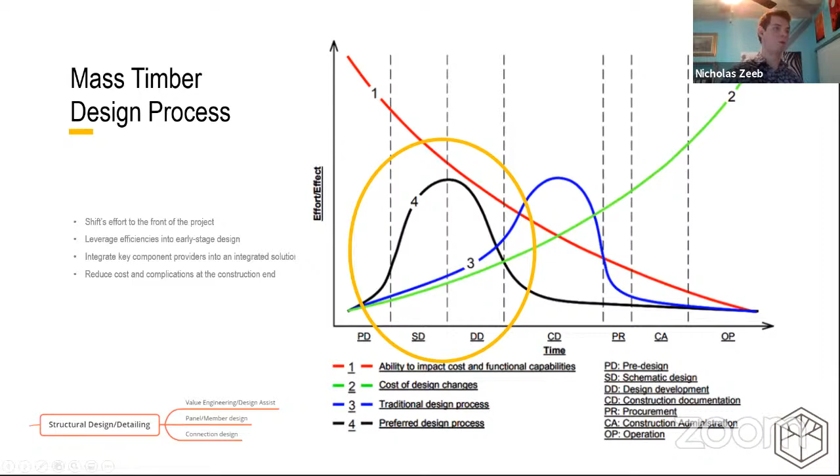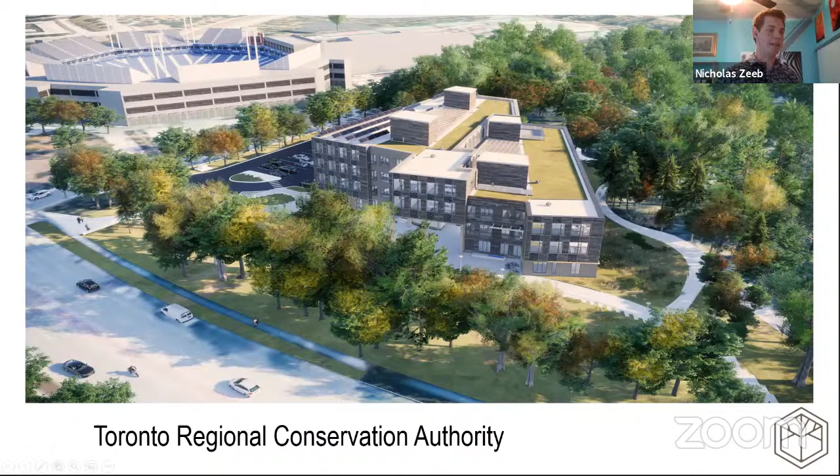So now going into the 3D modeling aspect of our workflow, we're going to use an example of our largest project to date, which is the Toronto Regional Conservation Authority headquarters, which of course, given the name of the organization, just had to be built in mass timber.

This is a rendering of our full LOD 400 model ready for manufacturing. We've modeled every individual one of the 567 CLT panels, 1,061 glulam elements, and 320 unique connections. Beyond that, every penetration, every screw hole has also been modeled so that all of that work can be done prefabricated in the factory and ultimately reduce time on site.

What this requires is intense design coordination with MEP and other trades to ensure every penetration in the structure is accounted for upfront. Where a typical construction would require a lot of these details to be coordinated on site, instead we're coordinating this early on the computer with all the appropriate trades to ensure everything lines up, there's no clashes in the model, and the building can be erected seamlessly.

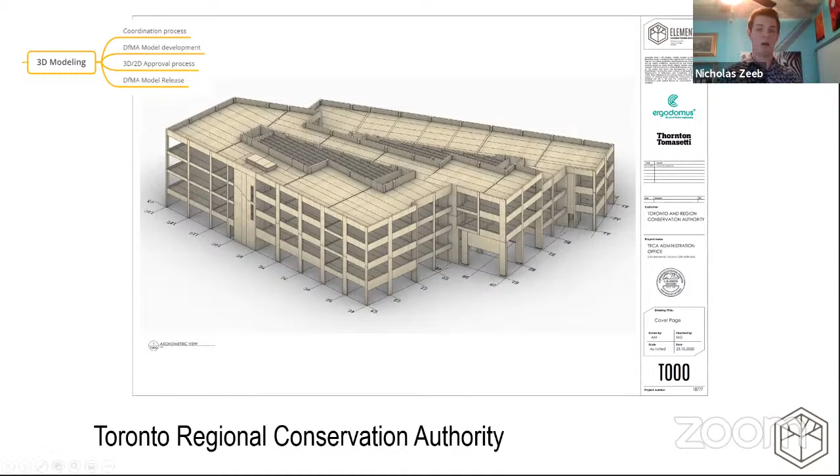Moving on to the third category, we're going to look at production, and this is a model or rendering of our factory in St. Thomas. Honestly, this doesn't do it justice for just how big this factory actually is. The factory will be fully operational by April 1st of this year.

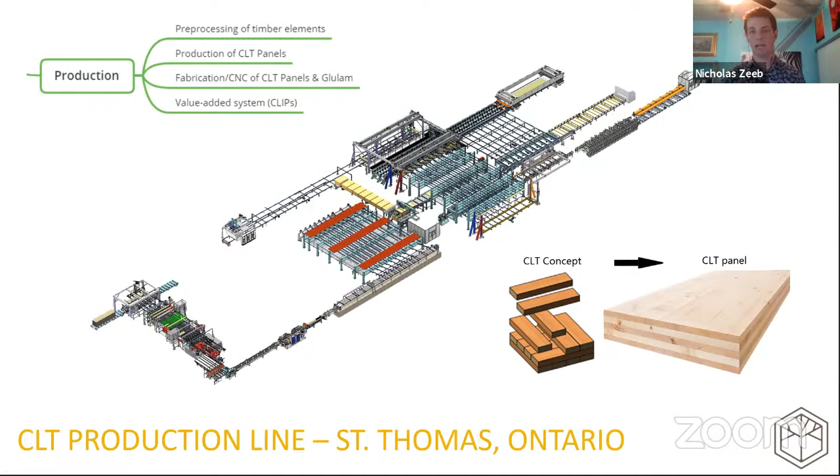All of the wood that we will use to produce our CLT panels and glulam elements will be made from Ontario forests, and all the wood will be FSC certified. When the plant is up and running, it'll be the most automated mass timber manufacturing plant in the world, and we will happily hold that title for about 4 to 6 months until the next one is built.

This set of photos might do the factory a little more justice, just to show how big it is. You can now see people next to the massive machines. What we're showing here is the volume of wood products we can produce. At full capacity, we can produce about 50,000 cubic meters of mass timber in one year.

What that means is, we talked about the Brock Commons building earlier. When that was built, that was the tallest mass timber building in the world.

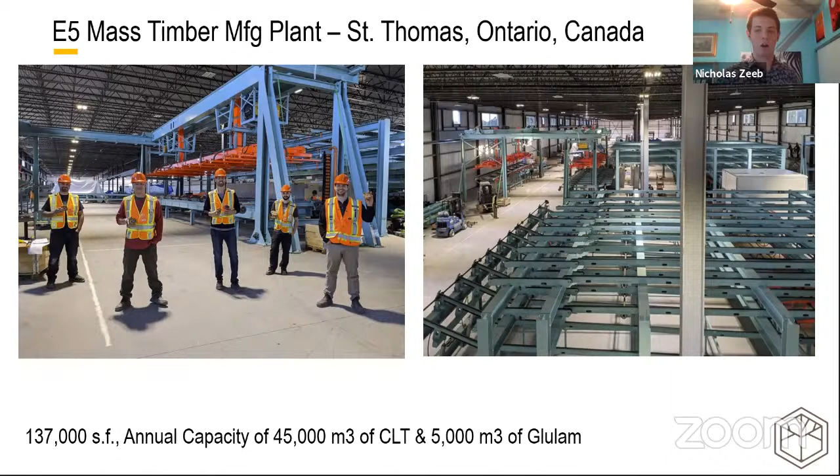Our factory has the capacity to produce about 22 Brock Commons in a year, which is incredibly exciting for the amount of mass timber potential. Interestingly, in terms of scale, all that wood can actually be regrown in North American forests in about 135 minutes, so we're still well within a sustainable mindset there. For all that material, the total potential carbon benefit is about 62,000 metric tons of CO2, which is like taking 13,000 cars off the road in a year.

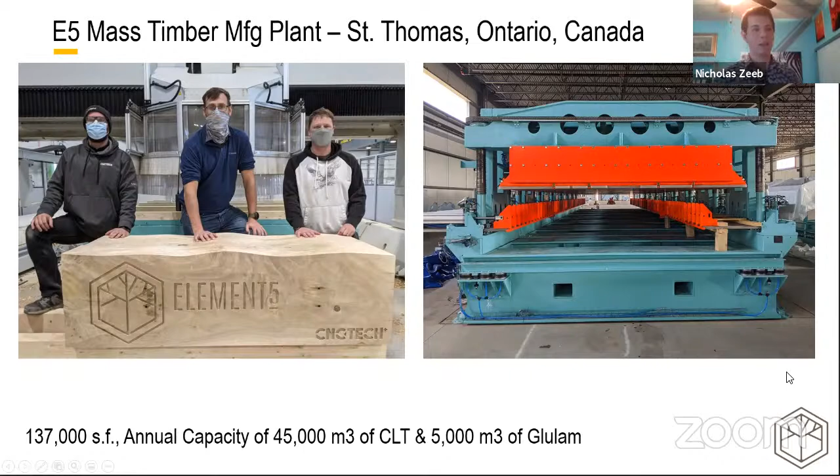Now, one of the problems we have with the mass timber industry is that we want to avoid being considered a component supplier, because as alluded to in the other presentations, every design is different, every project is unique. So just having a set of components, the way you would have a set of screws, is not going to use mass timber to its fullest potential to solve the climate crisis.

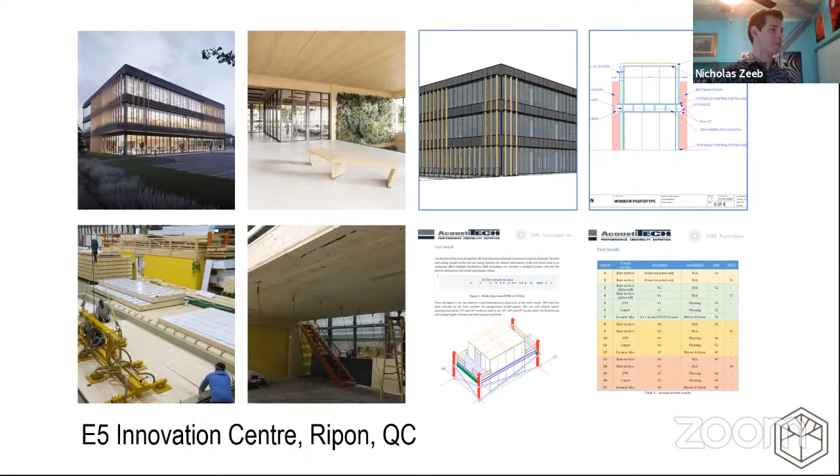Originally, this was designed for a mass timber building so that both the structure and the envelope could go up simultaneously, side by side, enclosing the building as quickly as possible. But we've realized and had quite a bit of success offering CLIPS as a solution even for concrete and steel buildings. Which brings us to our fourth category, which is installation.

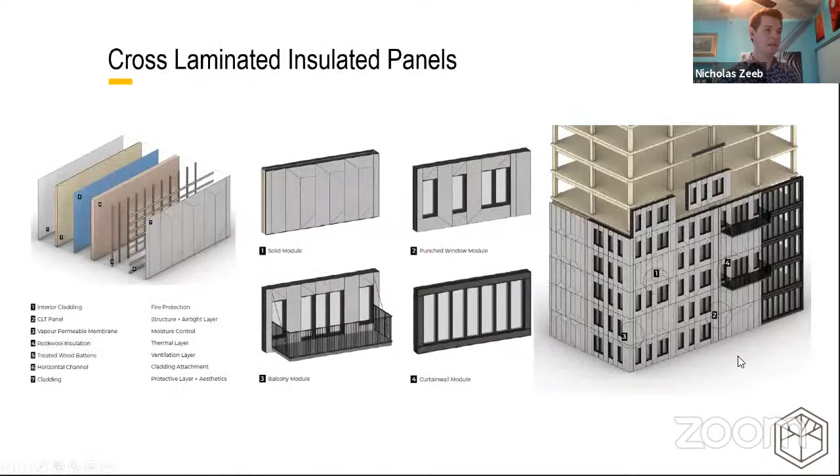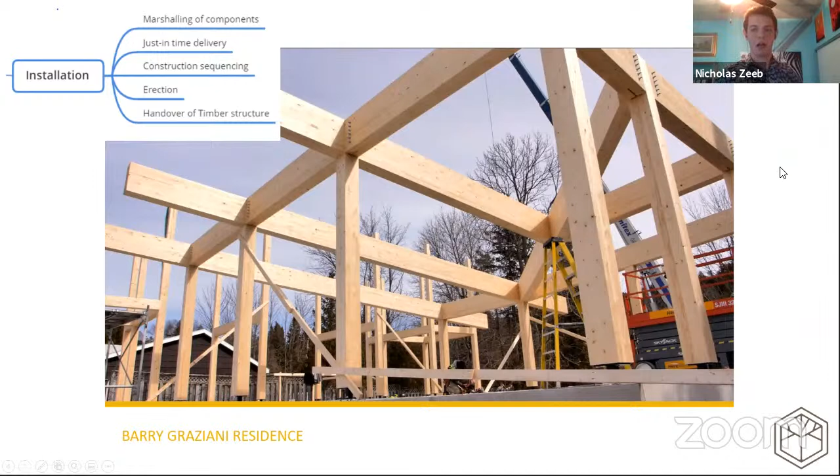If everything's done properly, we've seen a mass timber product be able to be erected at a rate of about 8,000 square feet of building area per day with a mass timber solution.

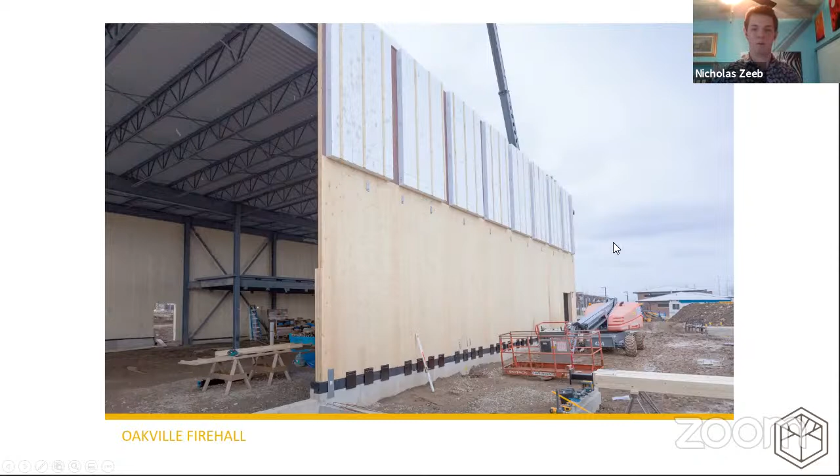Thanks, Nick. Thank you, everyone, for amazing presentations. I really enjoyed watching how that common center of integrated process and information-driven approaches emerged.